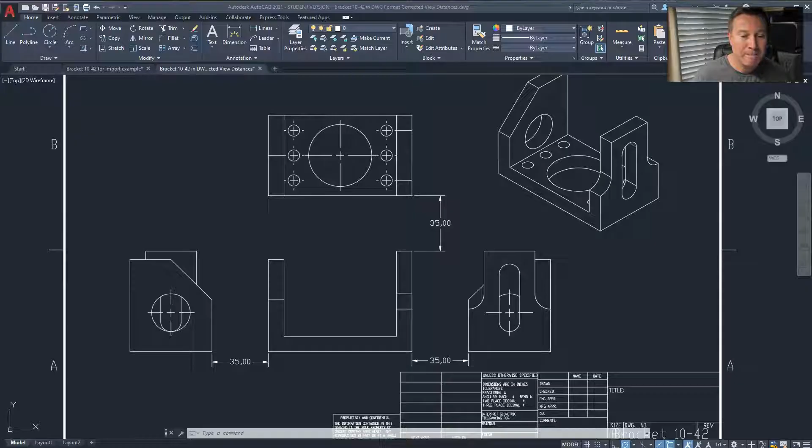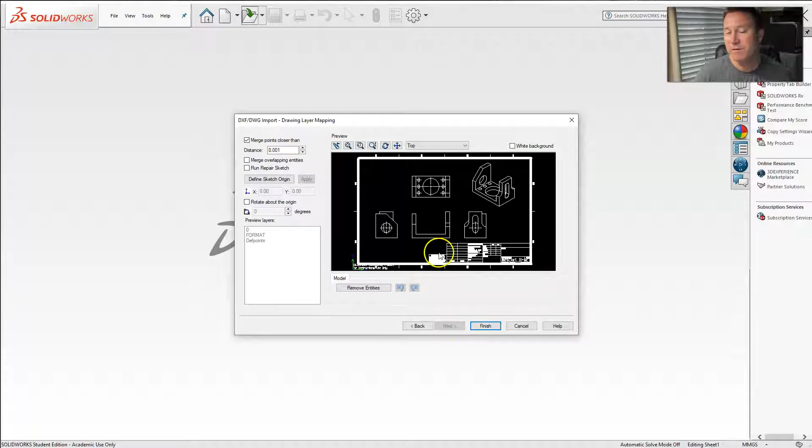So open up our SolidWorks. I'm opening up one of the corrected view distances. Import 2D. Next. Change to inches. Next. I'm just going to skip this portion, just to show you that I can actually trim it out when it is in SolidWorks on the sketch plane. I can say yes. I can say no. It doesn't matter on that one. So here everything is actually imported onto the front plane.

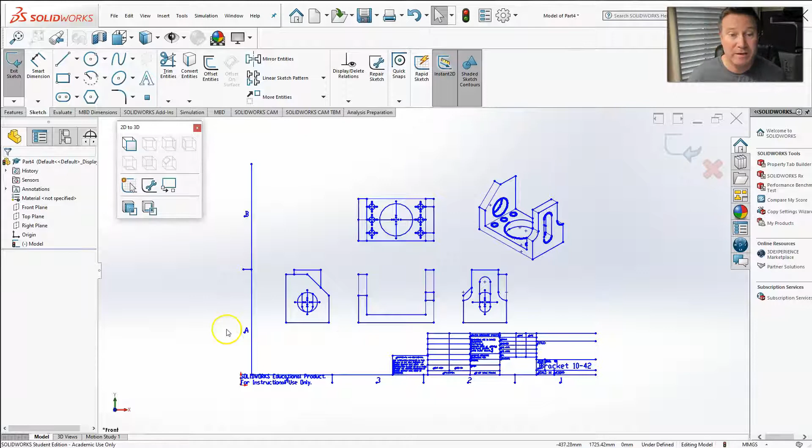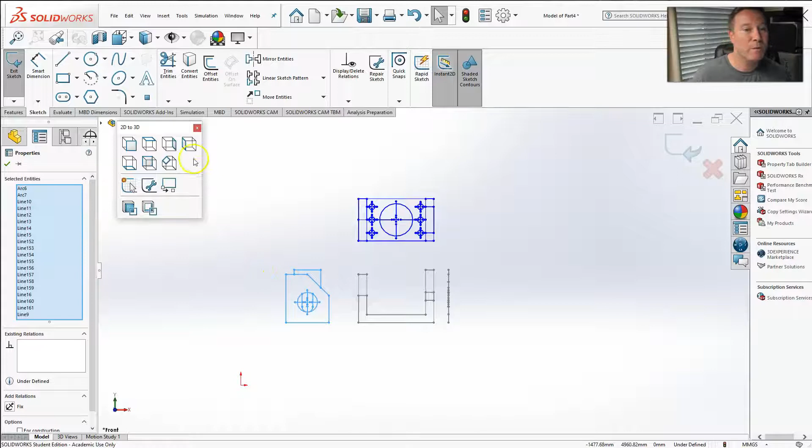And this might actually make it easier to select things since you have a lot larger view of everything. Now let's get to selecting the front plane. I can either select it in the tree or I can just window it. Here's my front view. Let's do our right view real quick. You'll notice that the center marks and center points rotate also this time. That's just part of the view.

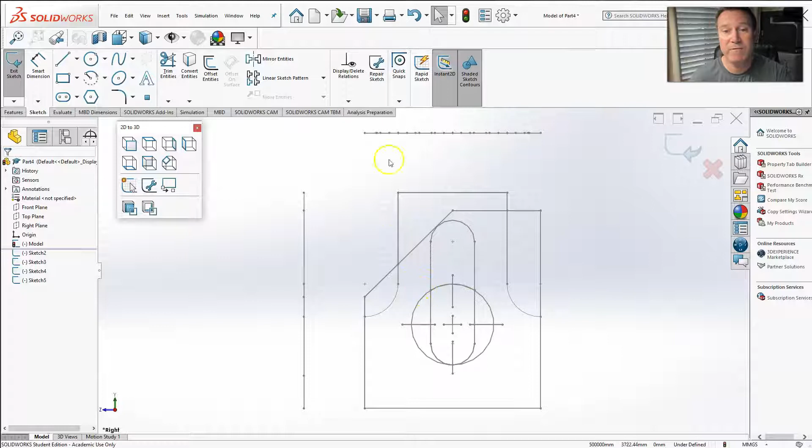They're there. Let's check the alignment. See? Look at the right view. It's aligned. Looks like the left and right view are both aligned to the top and the front. So it came in perfectly. Now let's do our first extrusion. Oops. Let me select the right side. Extrude. Select the portion I want to extrude. So I didn't have to trim anything. If I wanted, I can always just go through and select things, but I'm doing it the quick and easy way without cleaning anything up.

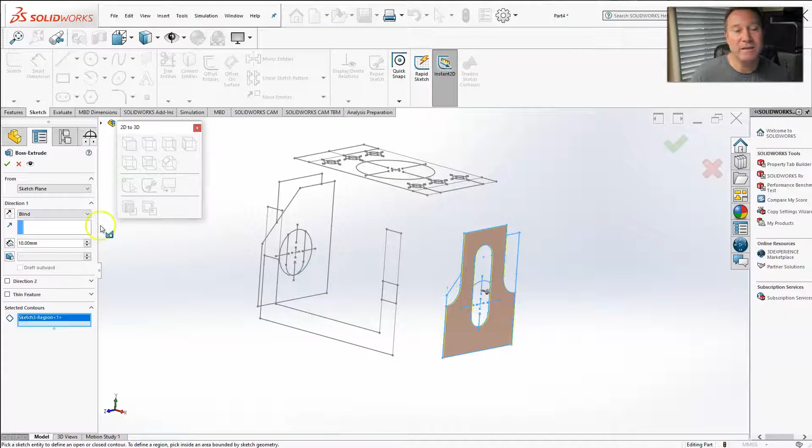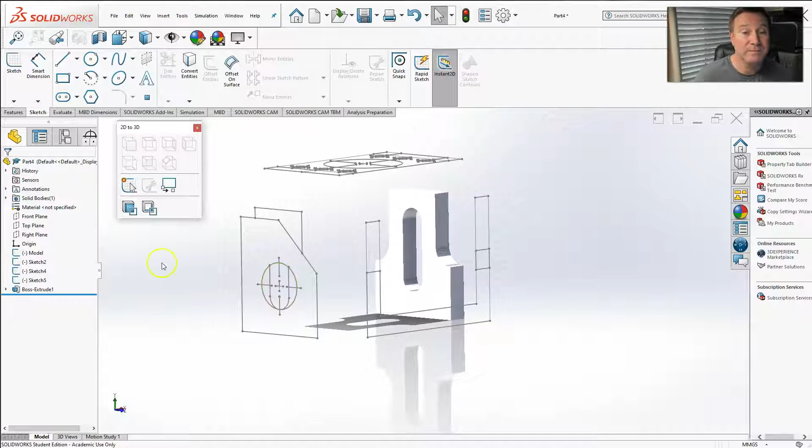Similar to the previous one, let's go from a vertex to another vertex. Here's our first extrusion. Let's do the same to the right side, I mean left side. Select the sketch. Let's do our extrusion. Select the portion we want to extrude. Vertex, up to vertex. I could have done from line to line. That would have worked just fine. Could even use the front here, this line to this line.

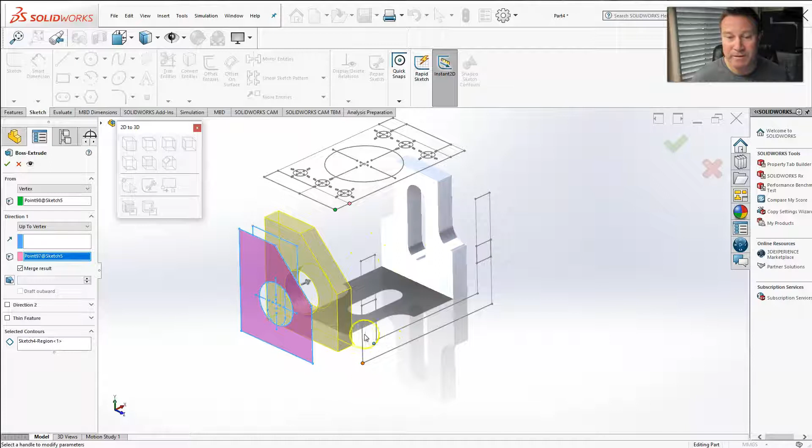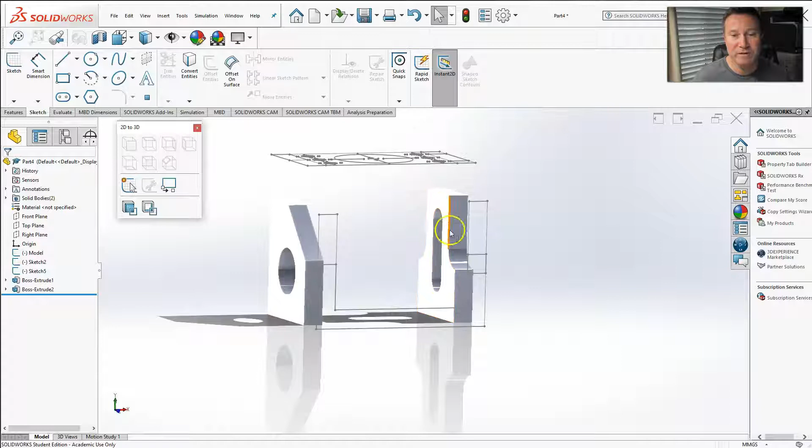Right and left are made. Now here's the part that will get just a little bit tricky. We need to now extrude just the base across the bottom. I don't want to use this entire open portion because then it's going to fill in portions of the slot and portions of the hole. So I have to modify this sketch real quick. Go to modify. I need to make the bottom just a bracket, or a large rectangle.

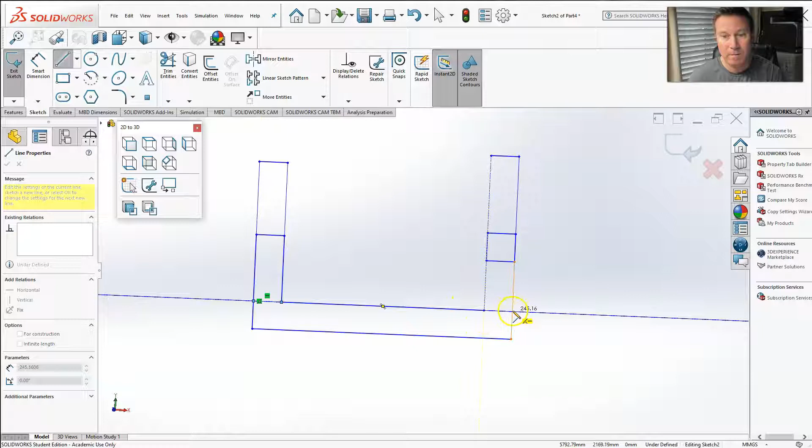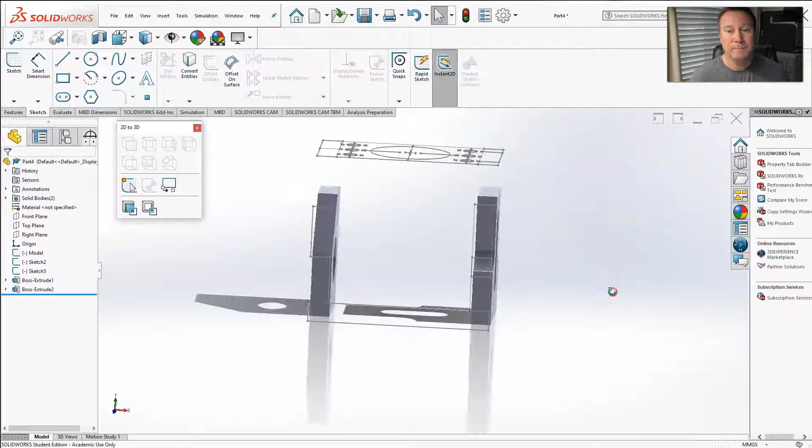One thing I noticed, I did this before. See this line right here? If I don't trim that out, it'll have issues. So I just need to trim those lines, because the only thing I'm interested in is this bar in the bottom. Now that sketch, I'm going to do my extrude. Select the portion I want.

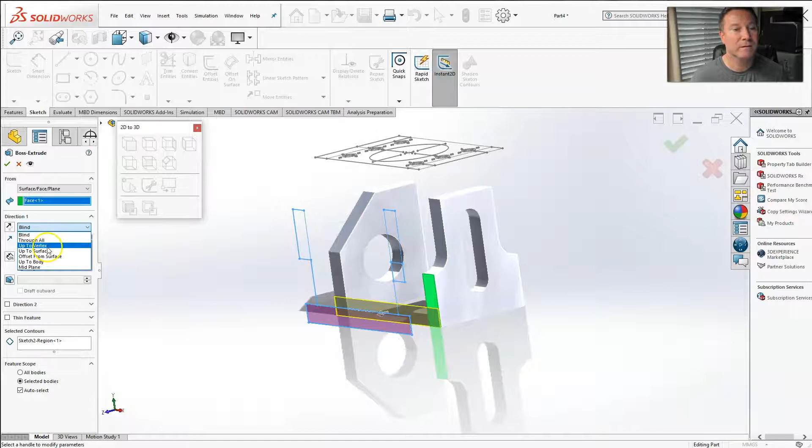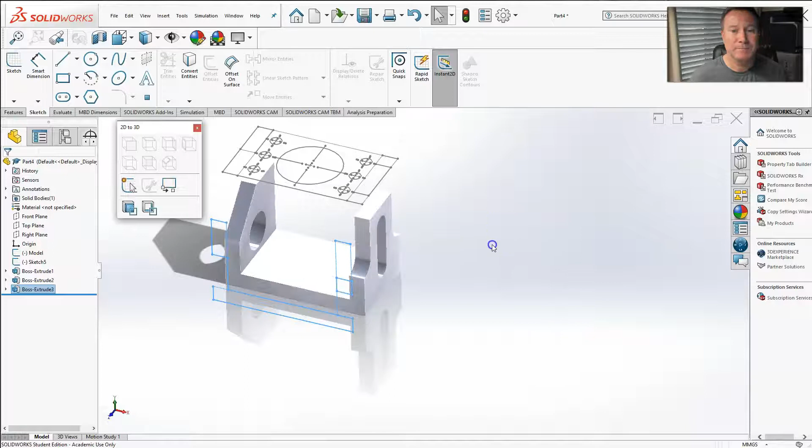Now here, I could do surfaces, because we have the front and we have the back. I could use the right side, which is what I'm using. I could use the left side. I could also use the top sketch and do from line to line or vertex to vertex. But since I have solid objects, and that's what I'm actually joining to, it's as easy to do that. Now we have our U-bracket. We had 3 extrusions, and now we're going to do 1 cut.

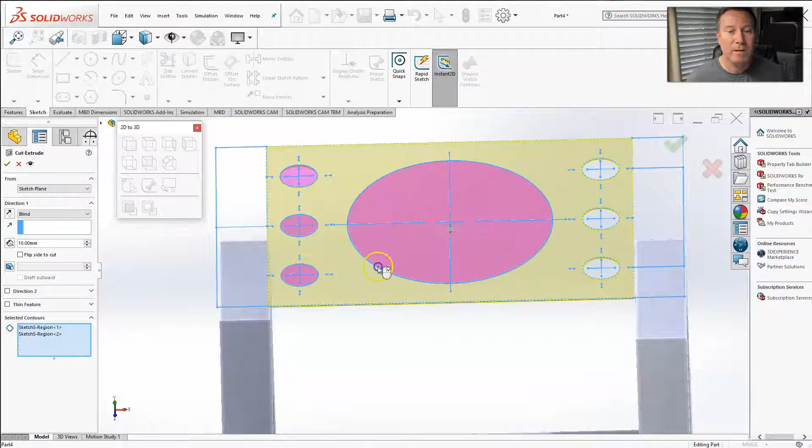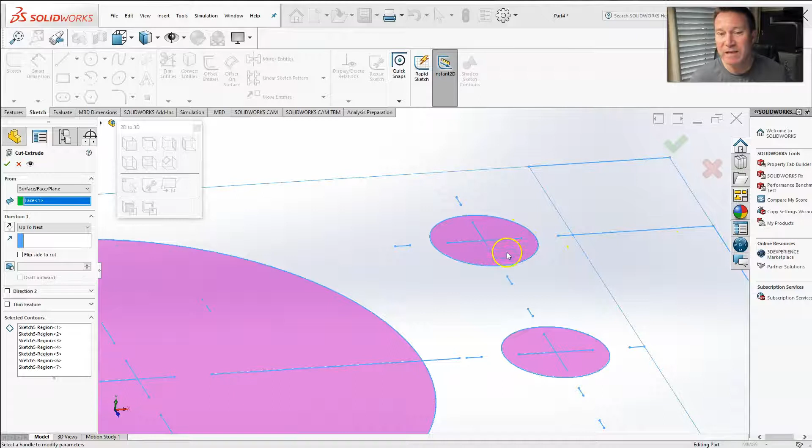And the cut is exactly the same as it was in the previous example. A little technical glitch there. One thing I just learned, you have to zoom in enough to make sure you don't accidentally click any lines or anything like that. It shows that it'll cut through, but then we get some errors. So I had to actually zoom in and make sure I wasn't clicking on any lines and just cleanly selected open spaces within the circles. And now that works. And there we go. Alternate method.